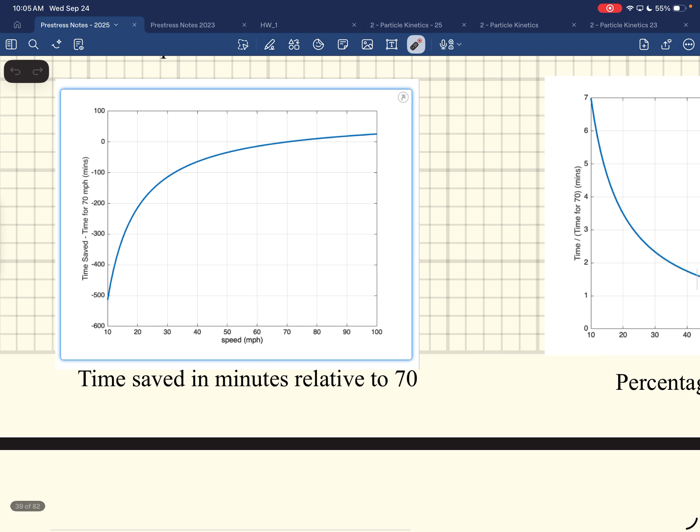How much time is that 30% for that one? It's 25 minutes in a 100-mile trip. But you're driving 100 miles an hour.

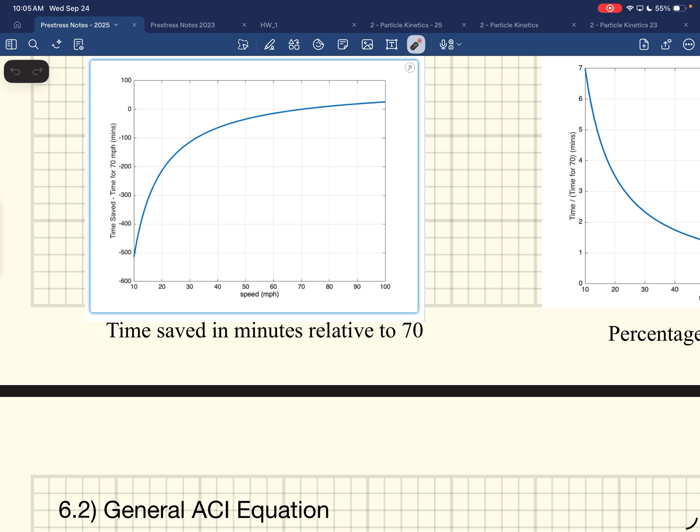It's dangerous. You know what I learned from that though? If the speed limit's 10, going 30 saves you a lot of time. If it's 60, oh, 70... God damn it, come on Luke. You're not allowed to talk anymore.

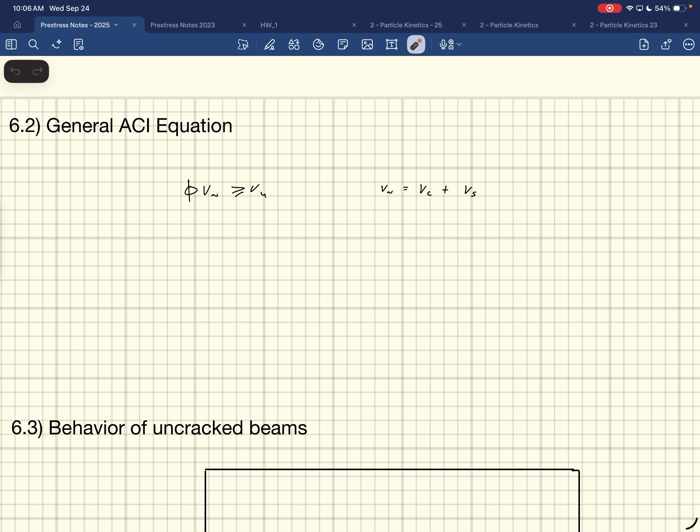Okay, back to this. You're right in that range. Where is the speed limit? School zones, 100 yards, those don't last very far, and it's 50. Parking lot, that long, but again the length is really short, so the amount of time savings, 30% is 20 seconds. That's right, okay, let's do it now.

All right, back to pre-stress. Oh, by the way, I started looking at masonry yesterday, I started putting it together a little bit. I should probably get... I'm fucking terrified, I am so scared, I'm really scared.

Have been the same notes for the last 20 years, those notes are older than I am, yeah they're really old notes. And then I did find what code governs it.

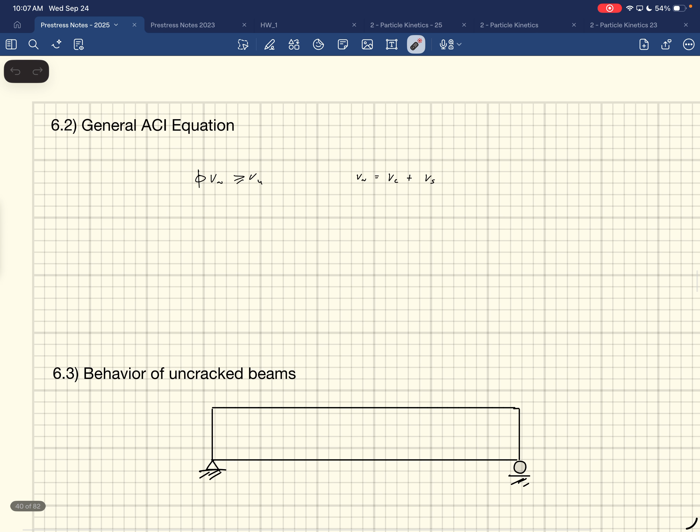I found that yesterday and started the process of getting it. That's a good first start. I thought Tim gave you that. Yeah, but his is from 2011, so what he had is pretty old. What's the newest one? 22. So you went 11 years. Anyway, I'm getting there. I'm starting early because I knew what it was going to be like.

How about what we did with Tim's computations class? I'd be down for that, an extra 15, I'd be down. Gavin is recommending doing a little bit more on Monday and Wednesday and skipping Friday. Let's do it all on Monday, just 3 hours on Monday. But then you're done at 9 on Wednesday and Friday, you're done at 10.

Okay, I'm ready now. Can we go from 3 to 6? One day a week, Monday - we're not gonna do it for 3 hours. 3 to 9, and we just do 2 weeks in 1 day.

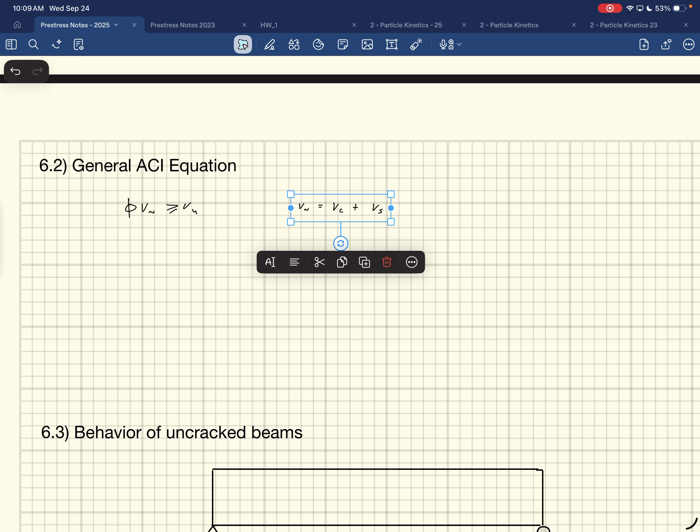So here's the general equation, right? phi VN has to be greater than or equal to VU. What is VN? This is the same equation, under the same section in ACI. It's the same general equation for this, I think it's chapter 22. We'll look at it in a few minutes. So everything's the same. This is what I wrote, this is the last thing I wrote. It took me 15 minutes to write this last time.

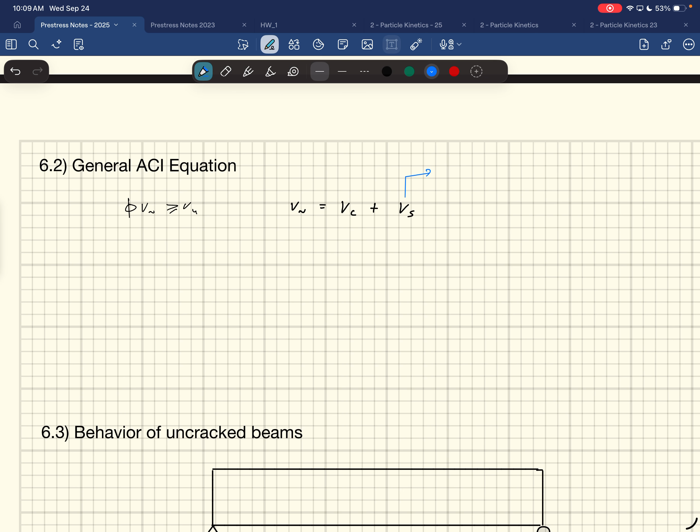So VN is going to be VC plus VS, okay? VS is the same as what we have done before. This is capacity from the steel, from transverse steel I should say, if you have stirrups in there. Same as regular reinforced concrete, right? Same equation, AVFY D over S, I think is what that is, but we'll look at that in the code in a little bit.

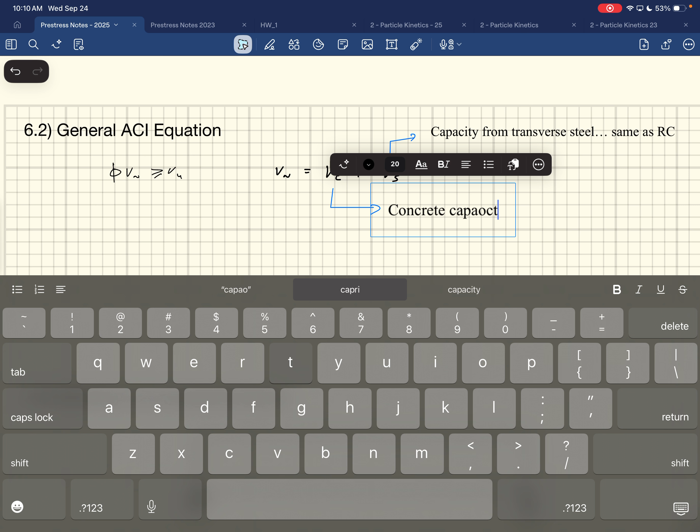Okay, so it's the same. What's different, obviously, is this VC, typing back to normal. This is the concrete capacity, the C standing for concrete. This is more complicated for pre-stressing than it is - it's actually very complicated. Like I said, this is going to be quite the exercise of going through the empirical stuff in ACI.

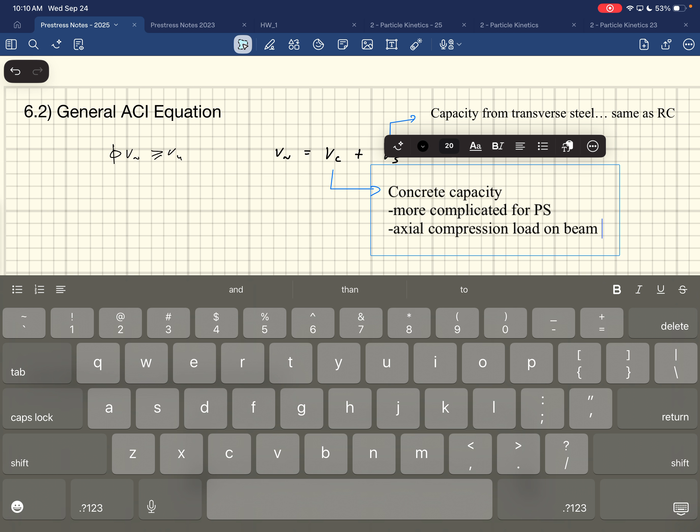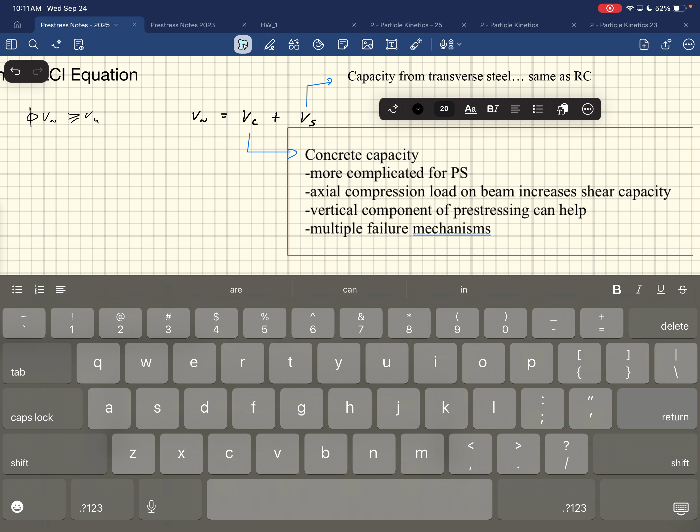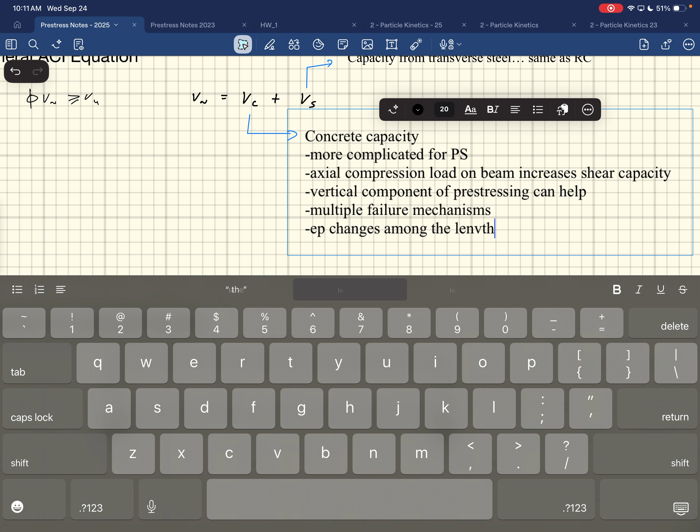Axial load or axial compression load on the beam increases shear capacity, and we'll explain how it does that in a minute. Vertical component of pre-stressing can help, I'll give you a little figure of that in a second. There's multiple failure mechanisms that we have to be worried about. And the other thing that complicates things is EP changes along length, but it's delayed here.

So these are some, and we're going to dive into these VC a bunch here in a second. It's more complicated for an axial compression load on the beams because everything's pre-stressed, so they're axially loaded. And then the vertical component of pre-stressing is this - if you have a harped, or draped section, there's a vertical component to this.

We kind of ignore that vertical component. We just pretend, in our pre-stressing, that these stresses are acting horizontal, but there is actually a vertical component to that. So some of our design equations will have that vertical component in it, to account for the help that gives. Doesn't help a lot, but it's something.

We're gonna do some mechanics here, this is what I like. I like teaching mechanics stuff, right? So we're gonna talk through this.

Oh, that's a Mohr's circle. We don't have to actually use it, we're just using it to demonstrate something. You don't have to draw Mohr's circles, I drew them for you on this.

This is a common thing you should get used to. When we talk about the pre-stressing on the end here, we look at a little stress block over on the side. We have a positive shear applied to this thing. Positive shear looks like that on that cross section.

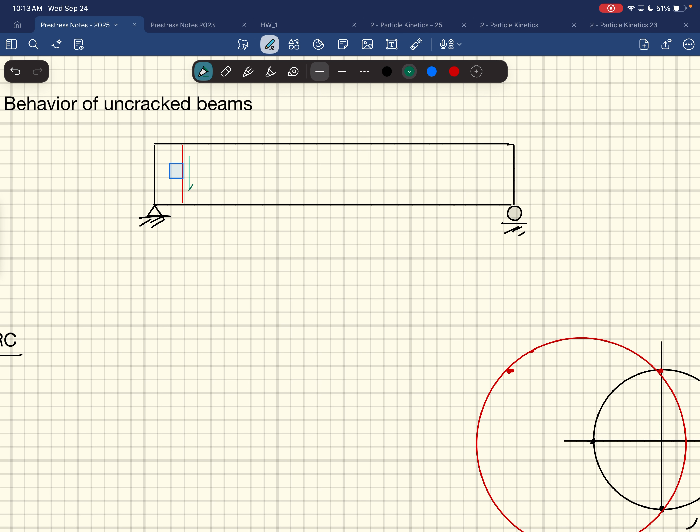So what does that look like when we look at our stress block? We're gonna draw our stress block for regular reinforced concrete right here. There's my stress block, with stress acting on it and that positive shear. On the other side it'll be this direction, it'll pinch towards the corners. This is what the state of that stress block looks like.

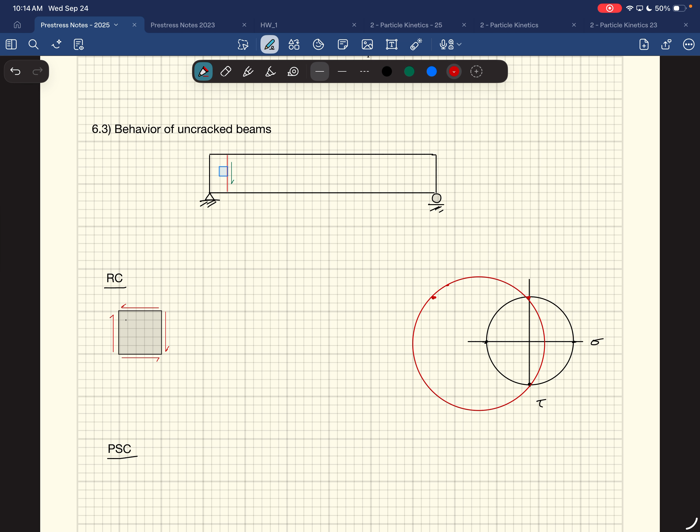So then what you do is put this thing in and look at its principal stresses. You remember doing this? You probably did this in concrete, or in solids. So you flip this guy on its side.

Let me see if I can copy it. Uh-oh.

They updated this system here and it's driving me nuts. Oh, I'm so mad at this update. How do I rotate this? If you cut it and paste it, it should give you the option. They updated GoodNotes like 30 seconds ago, they did it this morning. I could type now, but now I can't rotate anything.

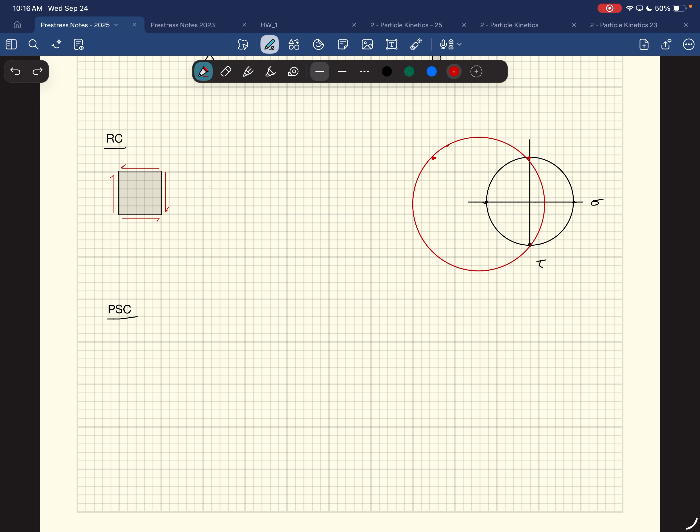Redraw it - I don't want to redraw it, Neil. I want to copy it and rotate it. I'm going to do it in Neil's head, I'm going to just draw it. I'm so sorry. See, Neil, does it look good?

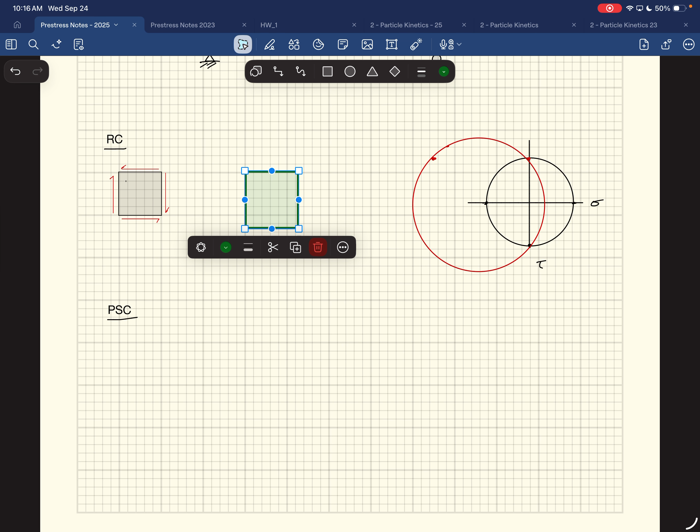Let's try one more, rotate the freshly drawn one. Man, imagine not being able to rotate - I do. Oh, those sons of bitches, why won't it let me do that anymore? I guess we just rebuild. Okay, all right, fine, let's draw it.

It's like making it into a diamond. Close enough - is it a rotated square? I rotated it, right, I rotated it 90. No, I'm just saying, is it not a rotated square? It is, but I wanted to just copy it over. What's the angle, I wanted it to be 90. Okay fine, you get it. All right, I'm obviously getting a little off here, wait sorry.

I'm trying to stay on topic today. Is this not the topic? You're making fun of Mike's geometry skills and my drawing skills, right?

So it'll pinch like this is what it'll do. This is what those principal stresses will look like, if you rotate this block 45 degrees. That's what the principal stresses are.

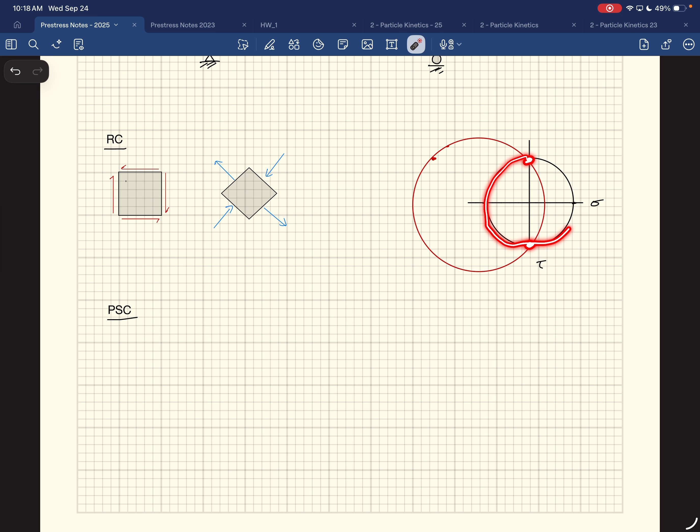You're gonna get one in compression - this side is in compression - and the other one is gonna be in tension. Here's the tension side going like this, and here's the compression coming in like that. A rotation of 90 degrees on Mohr's circle is the same as 45 degrees in the real world, if you remember that.

So I got to go from this state to this state, rotating 90 degrees, which means it's 45 over here. The whole point of this is to show that what I'd get is a crack like this. This tension stress is how concrete fails due to shear, due to these tension stresses. Those tension stresses get to a certain point and cause the concrete to crack and give way. That would look like this point right here.

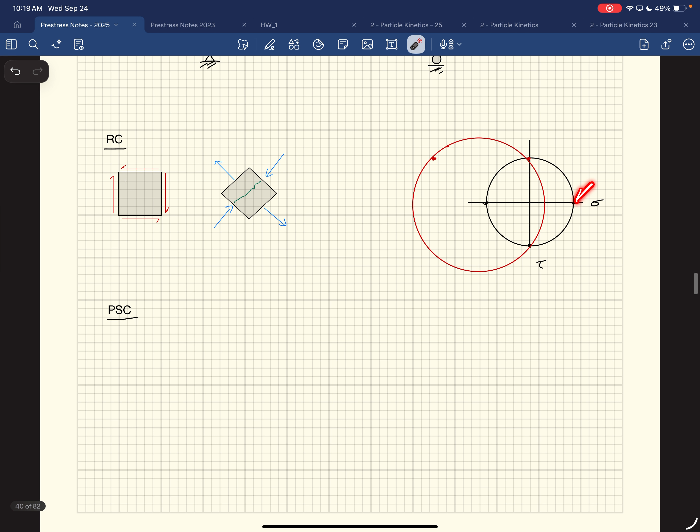And this, according to ACI, would be the rupture strength. FR is equal to 7.5 square root F prime C. So this would crack when my tension stress over there hits 7.5 square root F prime C. Okay, if I'm going to add pre-stressing into it...

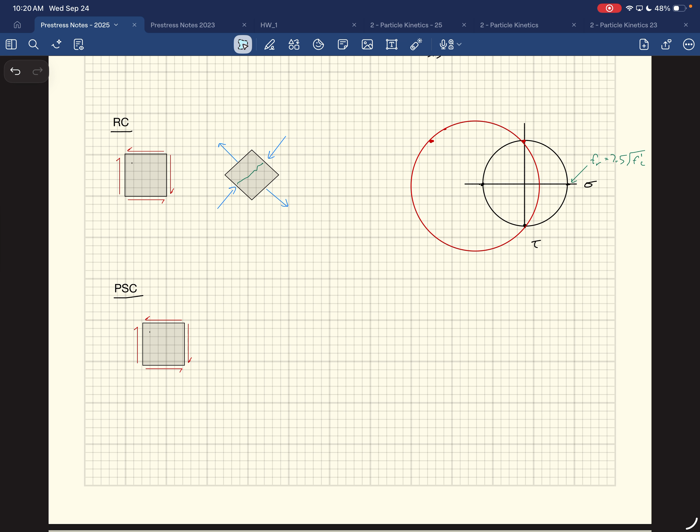Let me do that, I've got to copy these. So we're in a case where, if I have pre-stressing, I would have a big normal stress doing this. I used to just make it straight across, and now it puts it at an angle. We've added pre-stressing to it, and that pre-stressing on that beam would be a normal stress acting this way, not this direction. We're not going to have any this way.

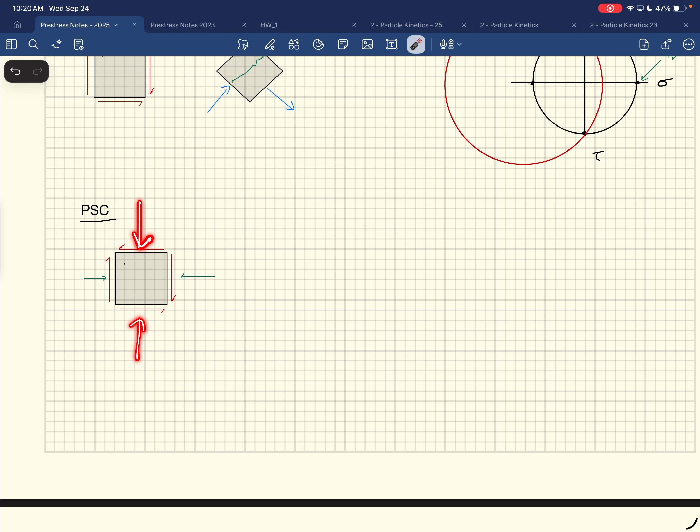You won't have it that way because there isn't pre-stressing in that direction. There's only pre-stressing in this direction, so on one of the faces.

So then on Mohr's circle, what that would look like is one face would have zero normal stress, and a shear. That'd be that point right there. On the other face, I would have a normal stress in compression, so it'd be this direction on the diagram because that's a negative value, and then the same shear stress, positive. So it'd be this point right here, and then you just draw a circle around that.

The whole point of doing this is to show you what happened to the tensile stress when I did that. They have the same shear stress, but the tensile stress moved to the left. So this one broke at this shear stress because it ruptured like that. This one won't break because at the same shear stress it no longer reaches that 7.5 square root F prime C, because that compression holds things together.

That's my graphical appeal to you—principal stress is what's happening. The other way to think about it is the concrete fails due to tension; we add some compression in there, and then it doesn't fail at the same load. You could say it the same way, but as an academic, I got to show you Mohr's circle.

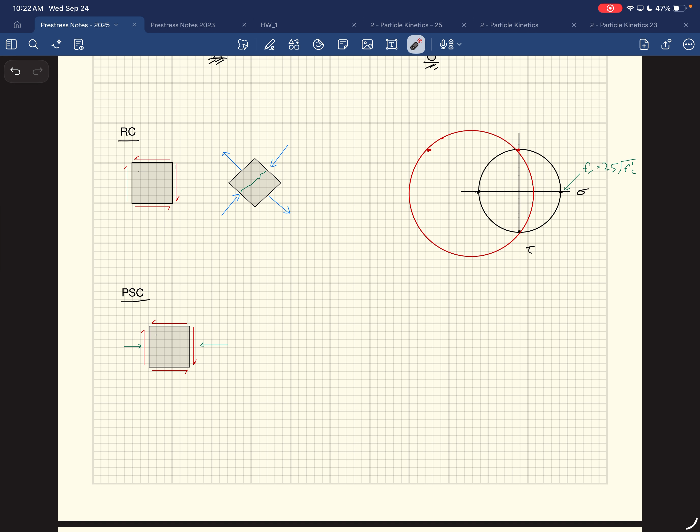So there you go—it adds that and shifts it over to the side, and then the angle would change too. The angle changes, it's not at 45.

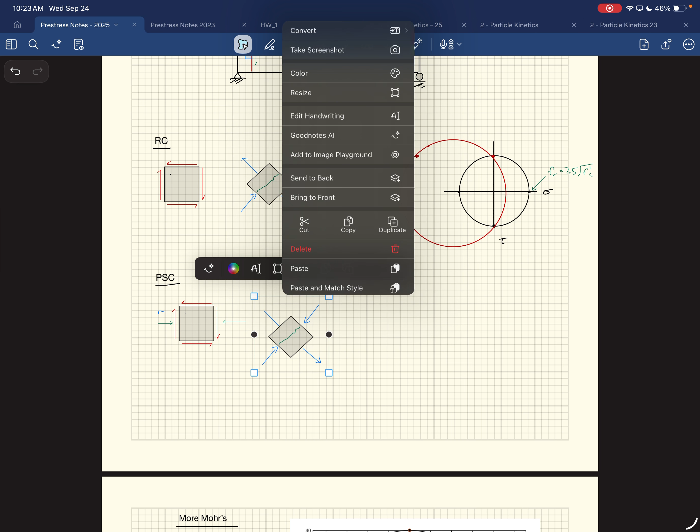It'll be steeper. Oh God, that's what I want to rotate. I'm going to try one more time to rotate it. I feel like that should be a command. See, there used to be a thing that was pulled down and I could grab that and drag it around. I don't know what happened to that. Ooh, what if you select it, like draw a circle around it, and then press and hold? Shouldn't it give you a menu? Yeah, you can't see it. I got paste and match style, zoom—oh wait, I got it selected first. Hold it, and then I could say convert, screenshot, color, resize, edit. Maybe it's edit, edit handwriting. What? It used to be resize. Yes, there's resize—it's new too. Just don't update stuff, man. You won't let me do that. Don't update it, don't update it. Okay, I'll just draw it again now. I'm so excited about the new update, now I hate it. Why don't they still fix this up? What do you—oh my God! I think it's an apple.

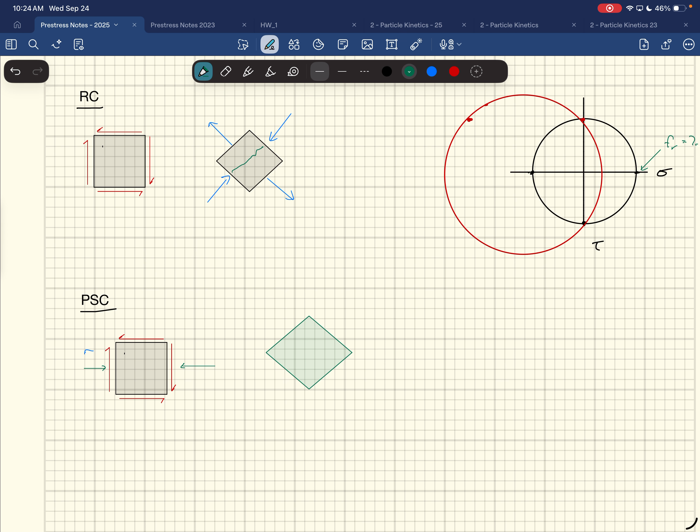That's the difference—whoa, this thing, it's not as steep. Hey, why can't I draw? I'm just going to go back to the old days, I'm going to freehand it. Oh God.

There we go, fair enough. The same thing, right, but it's just a little bit steeper.

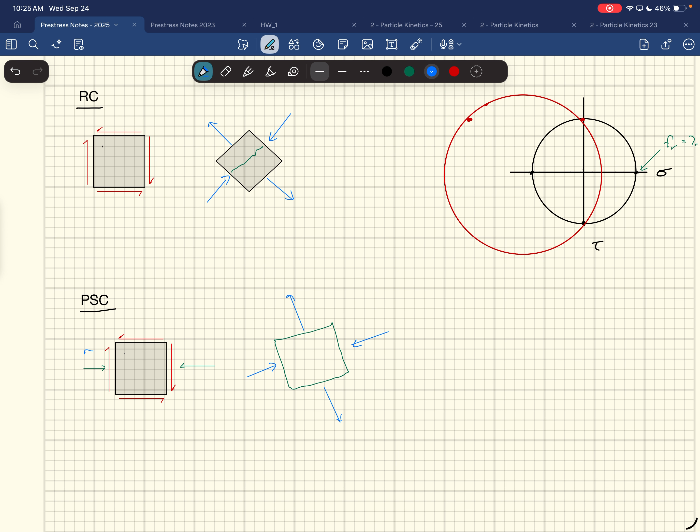So the crack won't be at 45-degree angles, right? It'll be a steeper crack that forms. All right, so the big part here is pre-stressing shifts the circle left and makes it bigger. That's the key takeaway from all that, right? The pre-stressing increases the shear capacity, right?

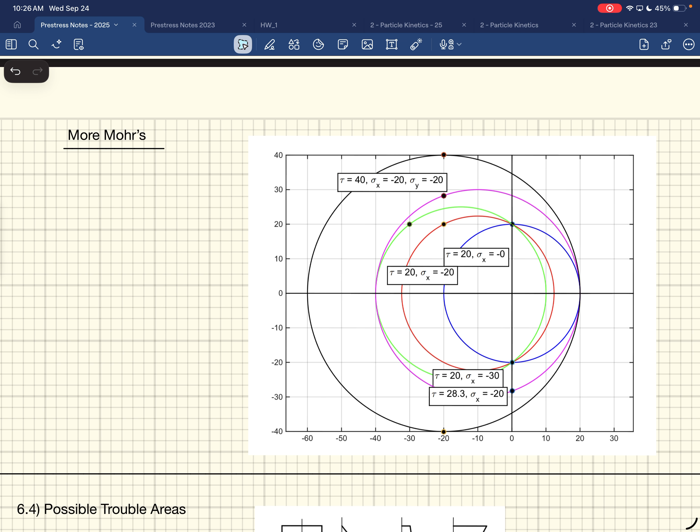So we do Mohr circle advanced mechanics, huh? Just in case you didn't have enough Mohr circles, I made some more. This is MATLAB. This was obviously from several years ago, and I made a function called Mohr circle, and then you just gave it things and it would plot the thing, and I had a little extra time on my hands. Just like yesterday when I made those plots about the velocities, I made those in MATLAB too. You get scared by masonry, and I was like, oh God, I'm going back to this stuff.

So what we got here, this is just like with actual real numbers and stuff, right? So this would be just the case right here, that's my blue one, right? That's my base case, which is just a shear of 20 and a sigma x of 0. So there's no compression on that one, right? And that one would fail. So according to this, this would hit the 7.5 square root of f prime c.

So that's where that one would break, okay? So then I just took the same stress state, the same shear stress of 20, and then I just added a compression stress of negative 20, so in compression. So that's what this red one is. And again, just to show you that it shifted it to the left, so that one would no longer fail, right? Because it's not hitting that 7.5 square root of f prime c, right?

And I did another one, this one right here, that would be the case there. That would be 20 and then 30 for the pre-compression. So we're adding even more pre-compression to it. And so that one's even less likely to fail, right?

If I wanted it to fail with a normal stress of 20, that is this guy right here, this pink one. And in order for it to get that one to fail, it'd have to get bigger, and because it's shifting to the left, I'd have to put more shear stress on it to hit that 7.5 square root f prime c. So it'd be 28.3. I would have to increase. I mean, there's your difference, right? At 20 psi in compression, I would have to apply a shear stress of 28.3 on it, versus if I didn't have any stress on it, it would fail at that.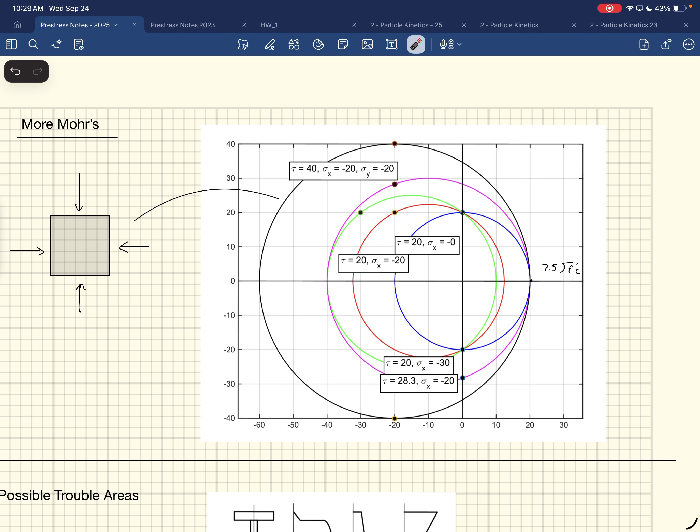Anyways, that's a Mohr circle business, which I like. Okay, so some more theory to get into, right? Because all this stuff is behind what we're gonna get to. You don't see Mohr circle, you don't see anything like that in the actual design equations. Actually, by the time you're done with the design equations, you're gonna wish that you did Mohr circle. That is a 100% true statement. It is 100% true, Garvin.

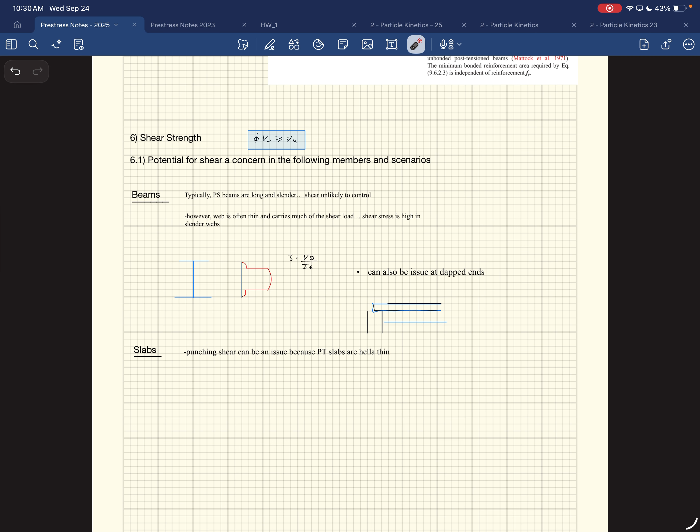Okay, so where are we going to see problems? We talked before about these beams. If you have a dapped beam, you can run into some problems there, and usually it's going to be in the web because of this. But where along the length of the member are we going to run into problems? Obviously, dapped ends would be right where that dapped end is.

Okay, so this is all in Stanton's notes. I've just taken this stuff out of Stanton's notes.

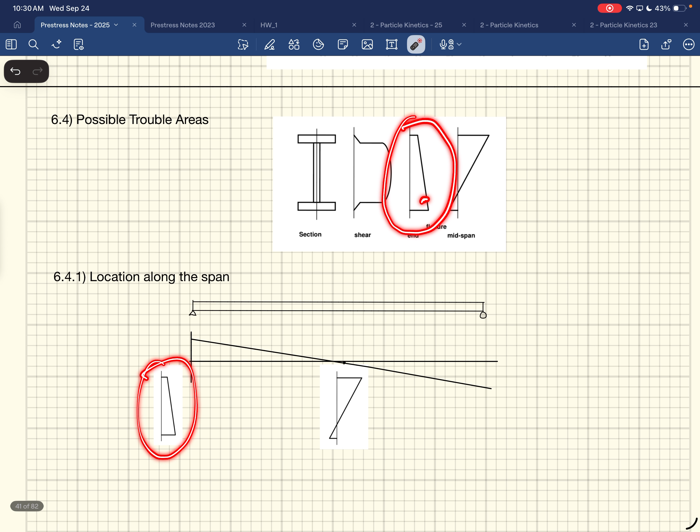So what we said before, that's what our shear stress distribution is going to look like in a typical I-beam. Near the end of the member, when there is no external moment, we're going to have a lot of pre-compression, because near the end the moment is zero. This is the case where the thing's popping up, where you have a bunch of pre-compression at the bottom and a little less at the top because it's kind of bending up, but most of my section is in compression.

If I have a lot of my section in compression, then I'm getting the benefit of the compression over the entire height of my member. So my shear capacity has gone up. The problem with that is the demand is really high over here too, so my capacity is high and my demand is high.

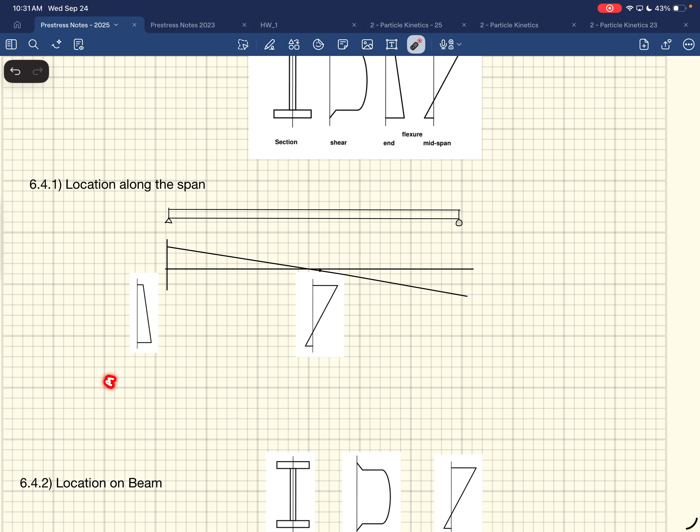So over on the left-hand side, demand is high but capacity is high too. Most of the section is in compression because there's no moment or low moment there, you get it.

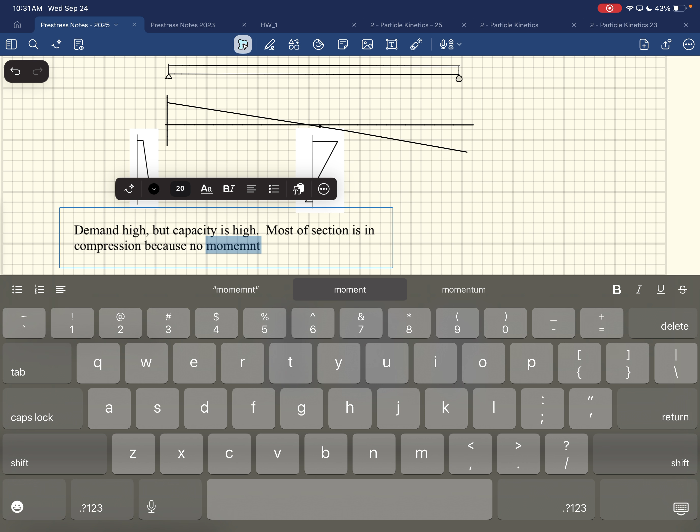Near the middle, you're going to have a lot of external moment pushing this thing down, and you're going to have some tension at the bottom up until what we're allowed to have, then really low compression and then up to some really high compression.

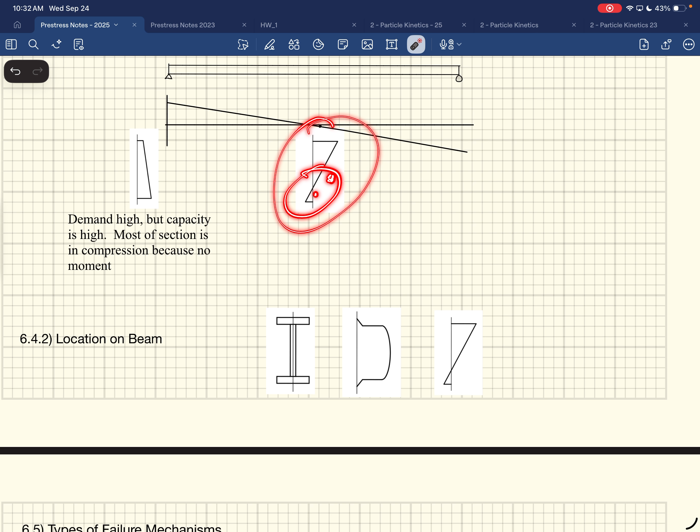So your capacity near the middle is going to be down, because near the middle part of our cross-section is going to be in tension, so the opposite will happen. If you add tension to these Mohr's circles, it's going to cause it to fail even faster in tension. Compression helped you, but tension is going to make it fail even faster. So near the middle, there's going to be parts of our cross-section that are in tension.

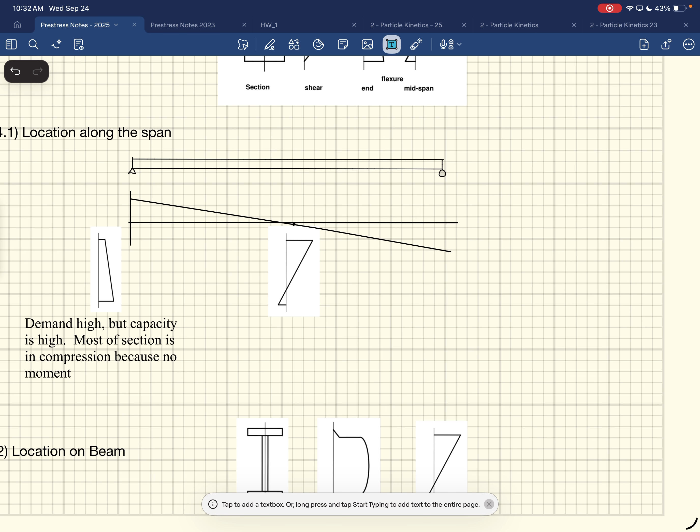But the benefit is our capacity is down, but so is the demand. Here's the shear diagram right here - the shear demand near the middle is really low. So here we say shear capacity is low, but so is demand. So that may not be the trouble area.

Where the trouble area actually is, and you'll see this in your homework, is in here... not like that. Oh, I'm so mad that you can't rotate these things. I bet it won't let me even do an oblong one anymore. There's got to be something.

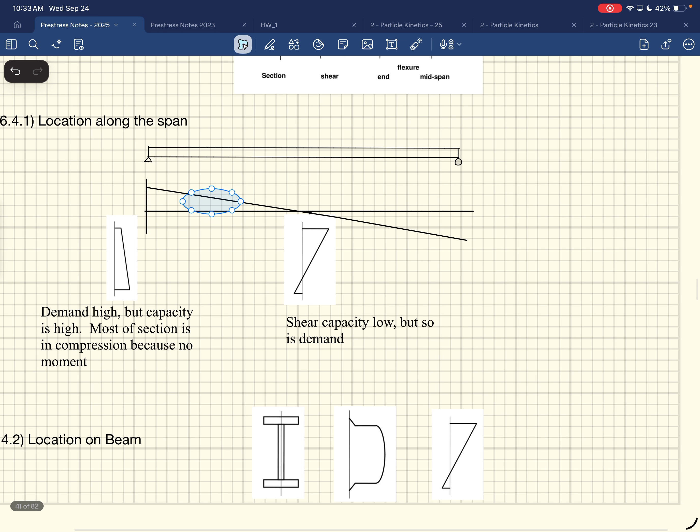Okay, anyways, that's fine. It's going to be somewhere in here, like I said, in our homework you're going to see that. That is where it has a problem, somewhere between the middle and the ends. Like I said, in your homework you'll see that if you do your homework right.

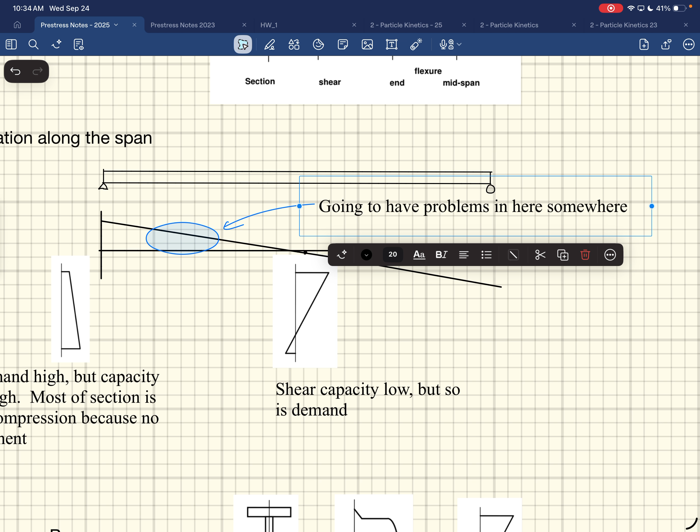Okay, that makes sense to everybody why it's happening, right? High demand but high capacity, or the other way around, and then shear capacity is low but the demand is low. So it's going to be somewhere in between. So where on the beam are we going to run into problems?

On the beam itself, we kind of alluded to this. You've got lower shear demand in the flange, because there's not much there - the VQ over IT, the T is really big, so there's really low shear stress right there. Where you're going to run into a problem is going to be in the web somewhere, because the demand is higher in the web.

And then it's going to start down here. The reason you're going to have issues here is because we have tension down there - remember, tension makes it worse. So you have tension near the bottom and compression at the top. At the top my capacity is actually pretty high, but at the bottom my capacity is low, because I have tension. So what it'll do is start near the bottom - it's actually going to be right here.

We have issues here - shear demand high, and beam may be in tension longitudinally.

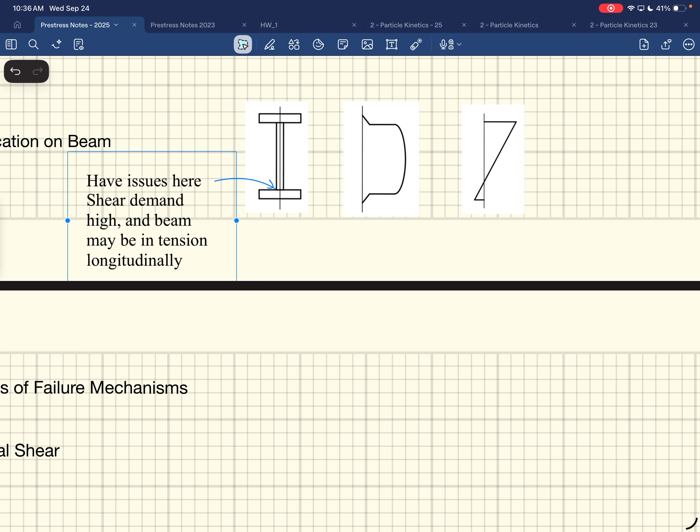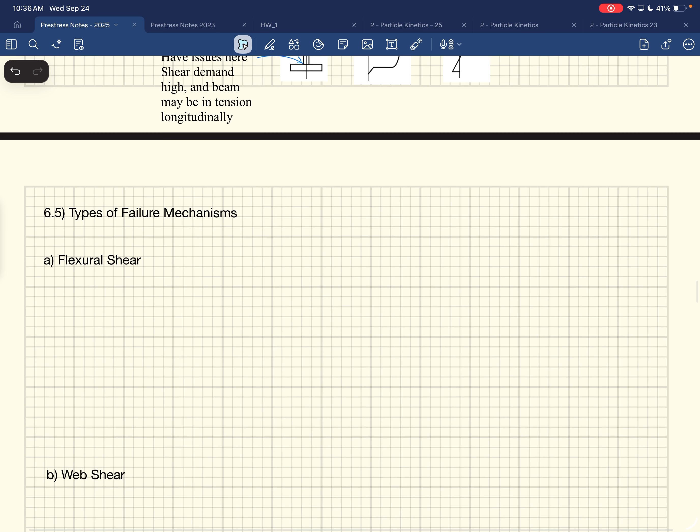So, types of failure mechanisms that we'll see. I don't know why I didn't give you pre-drawn beams, but I'll draw a beam now. Oh my God, that was a rectangle. God damn it, I need that tool.

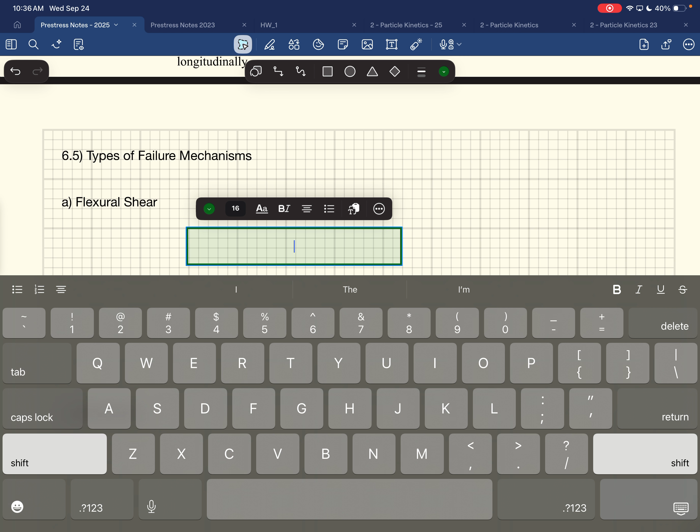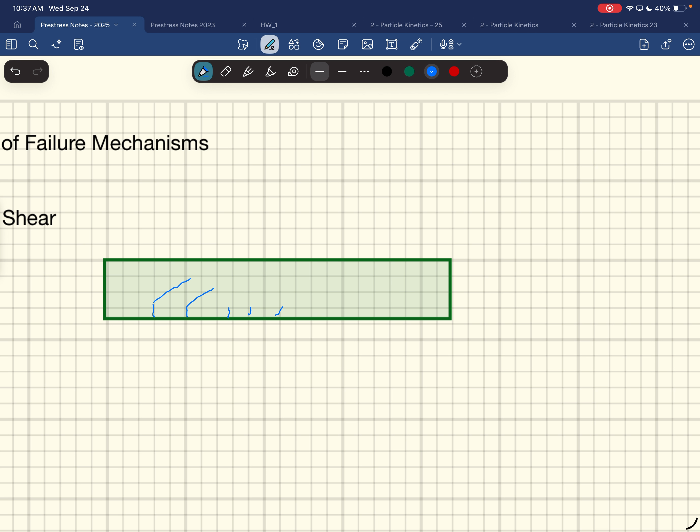So, flexure shear failure - why? Oh my God, the flexure shear failure, it's going to do this. It starts out as a flexure crack, goes up like that, and then it turns into a shear crack.

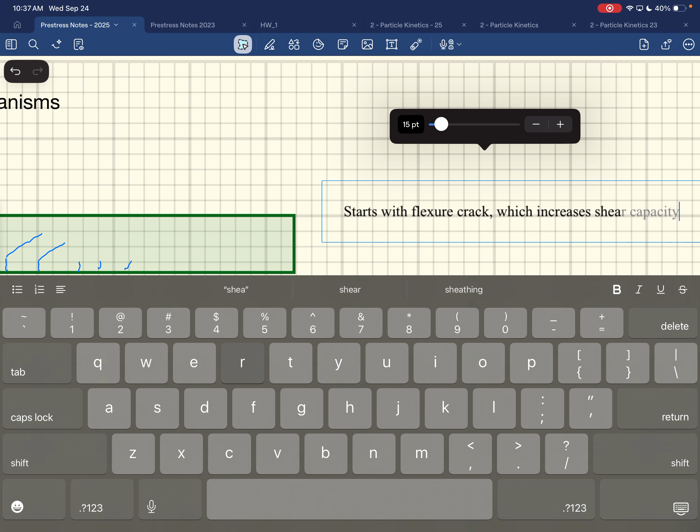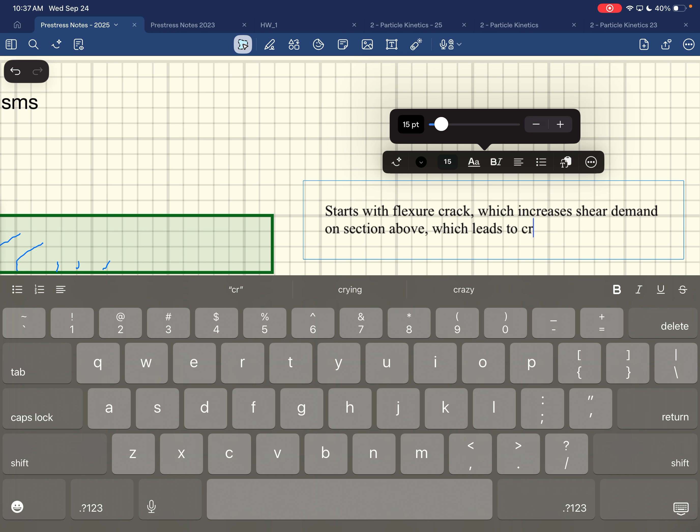Starts with flexure crack, which increases shear demand on the section above, which leads to a crack in shear. So it starts out flexure, the demand gets bigger, and then it shoots across like that.

This would be happening in the web, right? And actually it'll initiate in the flange and work its way up. In ACI, this is VCI.

If you're reading through Stanton's notes, when you get to this section, he has a big long section where he derives the VCI equation in ACI. Don't do that - when you get to his derivation, just ignore it. We're just going to use it, don't worry about deriving it, because like I said, it's pretty nuts.

But that VCI is for the flexure shear. And if we have web shear, it just fails directly in the web.

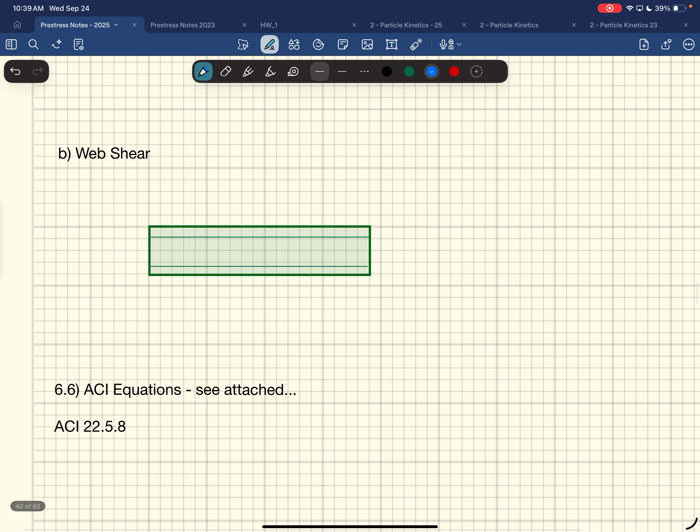And if this is an I-beam, you have the flange down here, the flange up here. And you just start getting cracks where you don't actually see any - they don't initiate as flexure cracks. The web just fails in shear.

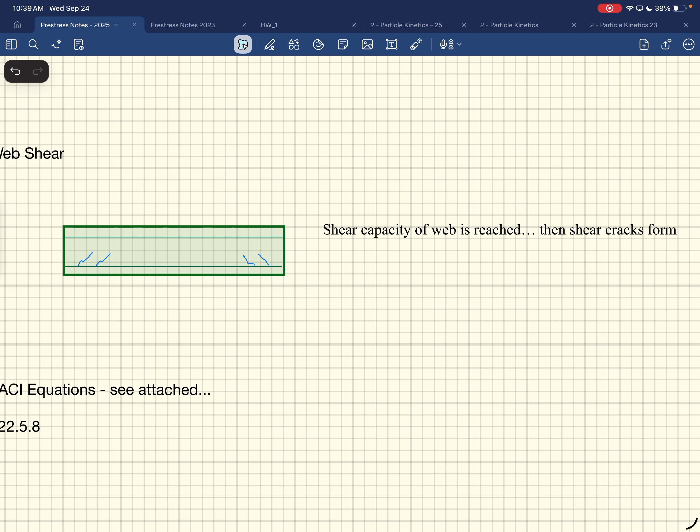Shear capacity of web is reached, and shear cracks form. This is VCW in ACI.

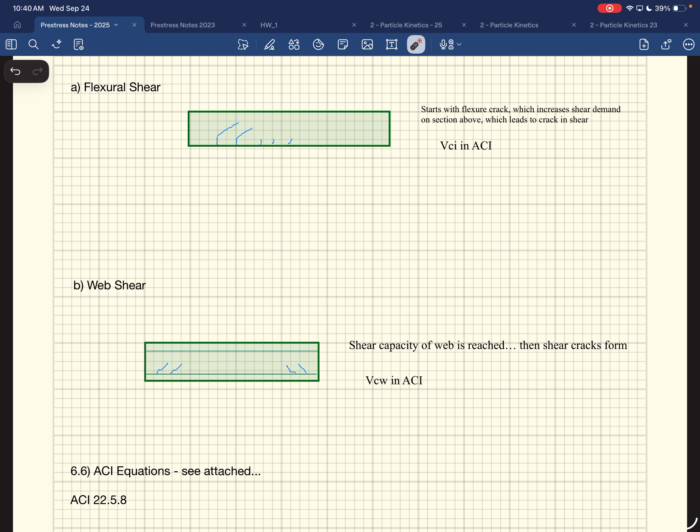There's going to be a calculation we do where we don't know which of these things is going to fail first - is it going to hit my flexure shear capacity first, or my VCW first? You have to calculate both, and then grab the lower, the weakest link. What gets complicated is that it can change along the length of the beam - in one location VCI might control, in another VCW might control. So you end up with a plot of both going across, and you grab the minimum of the two as you go across, and that gives you your limit. Just a little foreshadowing of where we're headed.

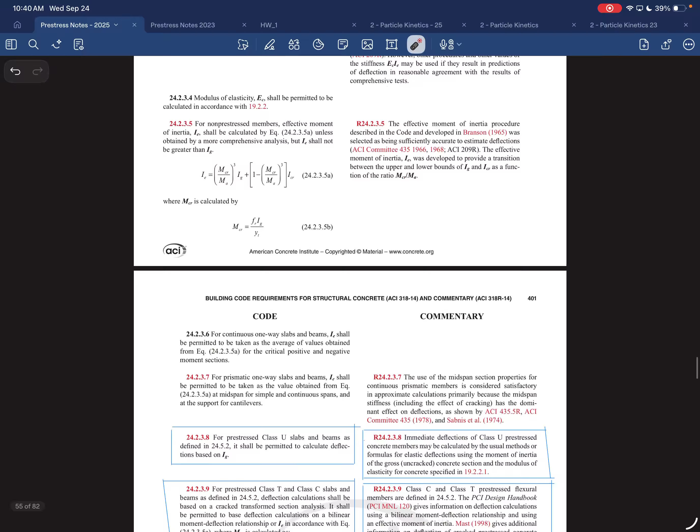I have the solution somewhere - nope, not in there. I have it here. Does it make you dizzy if you look at that?

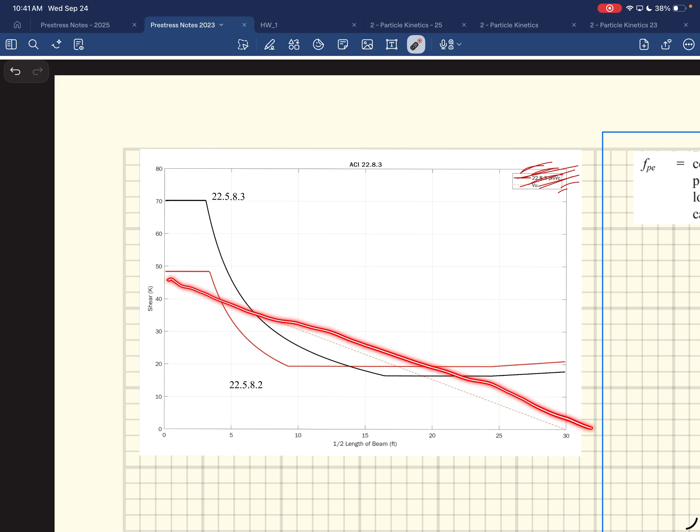So if you looked at all of these, there'd be one going like this, another going like this, and built into my code, I'm grabbing minimums as we go along, formulating that envelope we have. And then my demand is this guy going across. So like I said, where you're going to run into problems is somewhere in between. This is my demand, and this is where my capacity dips below my demand, somewhere in the middle. It's fine on the ends, fine in the middle since this is just half the beam, but it's in between that it's violating that. But we'll get there.

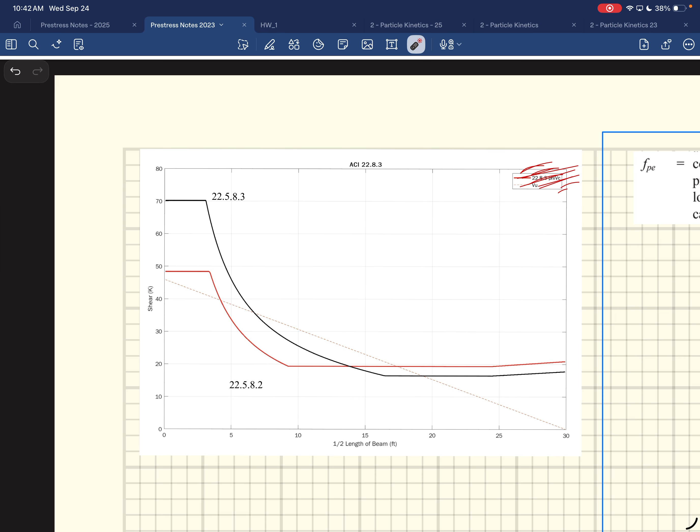Okay, so let's look to see what ACI has to say about it. Wait till you get a load of this. Starts out pretty innocent, right? So let's look at the ACI equation.

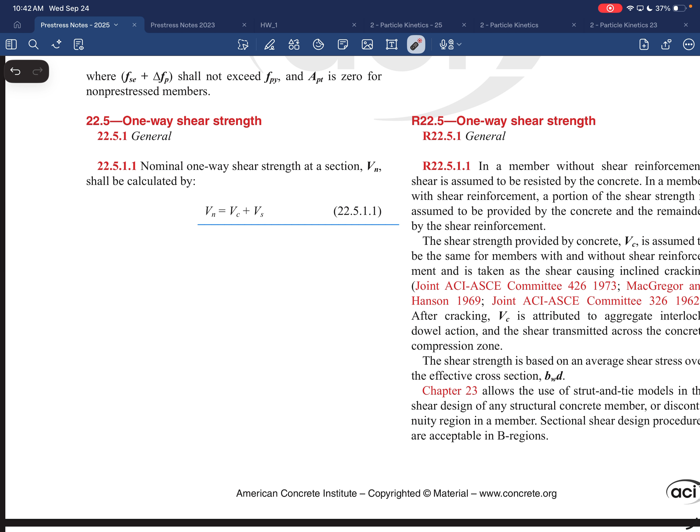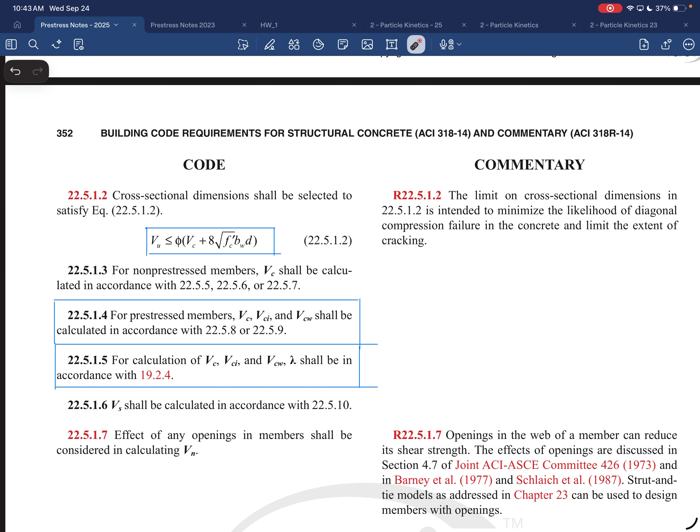So 22.5 is shear capacity in concrete, we get right here. It starts out for both - this works for both regular reinforced concrete and pre-stressing. Pre-stressing is built in throughout. So my VN is just VC plus VS. And what we use for VC, there's still this limit that applies here as well - this is just a limit on cross-section size, built into regular reinforced concrete limits you've done before. So there's that limit right here, and the only way you can change this is changing your cross-section size.

And it says for pre-stressed members, VC, VCI, and VCW shall be calculated in accordance with sections 22.5.8 or 22.5.9. So there's this section that discusses this.

It's going to make it an oval, I guarantee it. So mad. Oh, and it tries to turn it into text.

Okay, for calculation of VC, VCI, VCW, lambda should be in accordance with this. Lambda is just a lightweight concrete thing - we're going to stay away from that, but there will be a lambda floating around associated with the lightweight concrete.

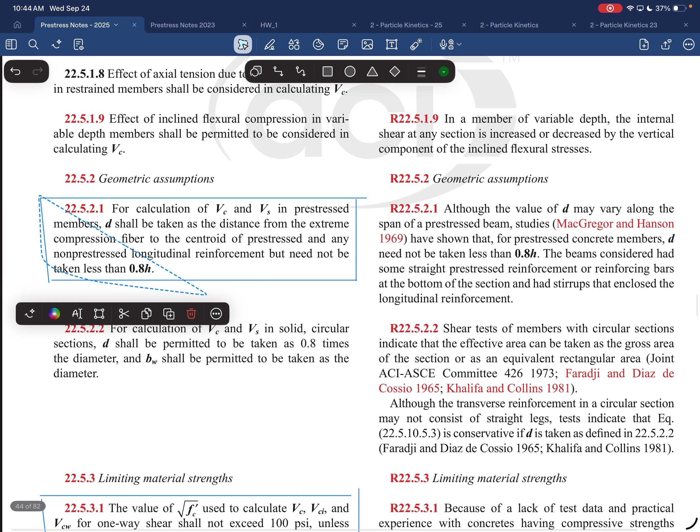Okay, then we come down to geometric assumptions. This is a limit that's going to be built into all of our code. I don't know why it keeps doing that.

It crashed on me. Okay, so for calculations of VC and VS in pre-stressed members, D shall be taken as the distance from the extreme compression fiber to the centroid of the pre-stressing and any non-pre-stressed longitudinal reinforcement, but need not be taken less than 0.8H.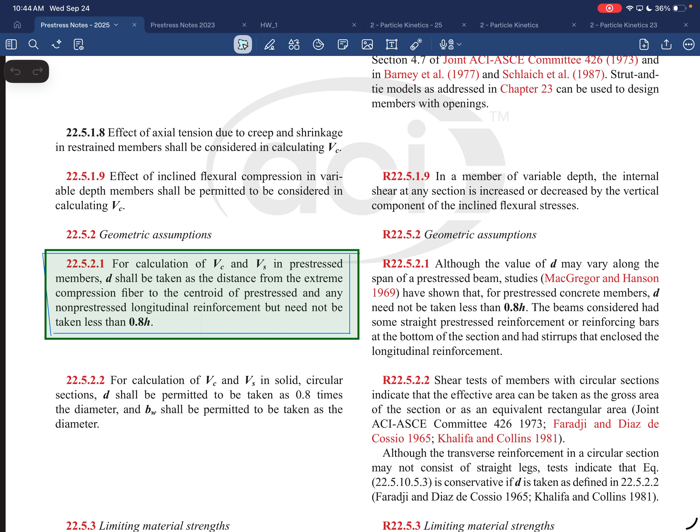Okay, so that's something you'll have to build into your calculation, is that it's the distance, because what's happening is D is changing along the length. So if it's a harp section, let's look at it like this - it's a harp section, it's going, oh gosh.

Right, my EP is changing, so my D is changing as we go along. The D is the distance down to the neutral axis, from the extreme compression fiber. I guess I should put a beam around that. Right, it's the distance - this is the distance D right here, from extreme compression fiber down to where the steel is.

And it's going to change as we go along the length of it, because our steel location is changing as we're going across. Our pre-stressing is - we're making it deeper near the middle and more near the centroid along the side. But when you're calculating this D, eventually that D could go to 0, because if this was right at the centroid, it would become really small, because it's going up to the thing.

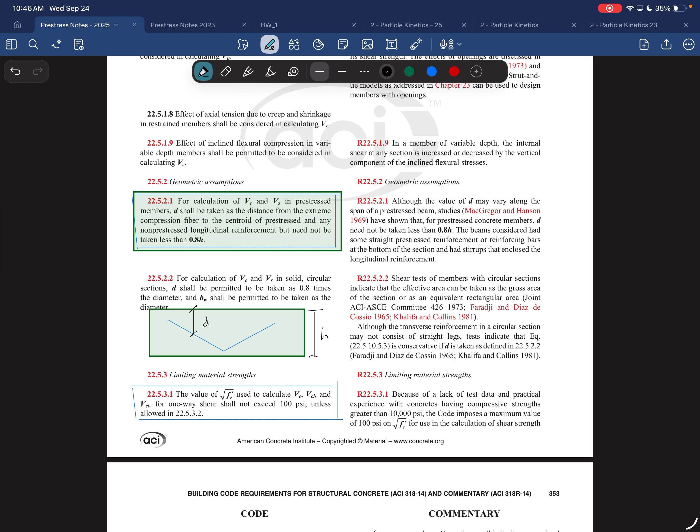It need not be less than 0.8H. It's saying that even though your D is less than that, you can use up to 0.8 times H - H is the total height on this. You can use up to 0.8 of that, that'd be your D. And so it's saying you could do that. So could you use smaller? Yes, you could use smaller values, but if you do that, then you're being overly conservative, because the code allows you to use 0.8H. You don't have to go smaller than that. Okay, so that's a limit that's floating around.

The other thing they put in there, I don't think this is going to affect us at all, but there is this right here. Oh my God. I wonder why it does that. So mad. As an engineer, I want to box it, I don't want to oval it. I don't oval my answers. You oval your answers? No, at right angles.

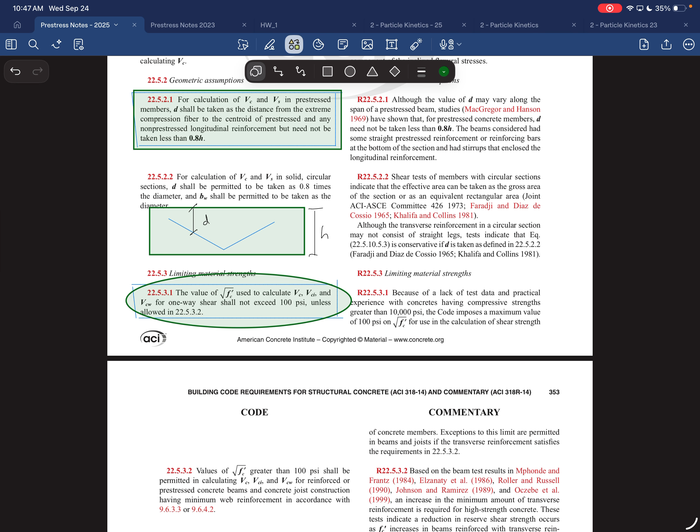There's a limit on the square root of F prime C. One-way shear shall not exceed 100 psi. So for an F prime C of 10,000 psi, or 10 ksi, if you take the square root of that, it'll be over 100. It says you can't go over 100. There's no research showing how these high strength concretes affect shear capacity, so they put a limit on it. You can use over 10 ksi concrete, but in these equations you can't use more than 100 psi for the square root of that 10 ksi. Keep that in mind as we go through.

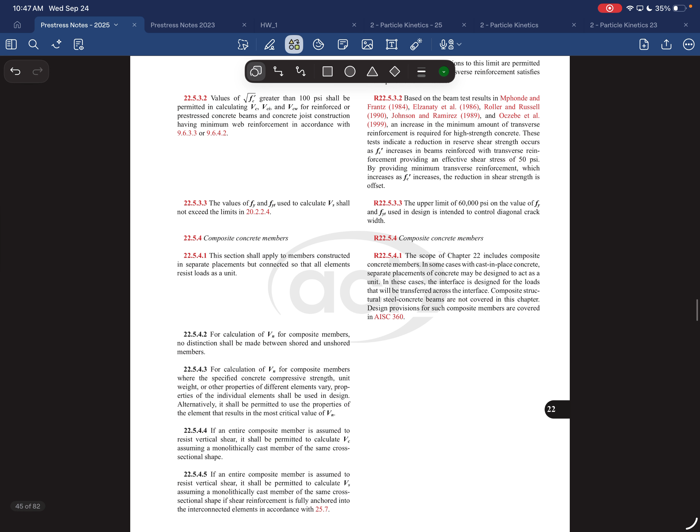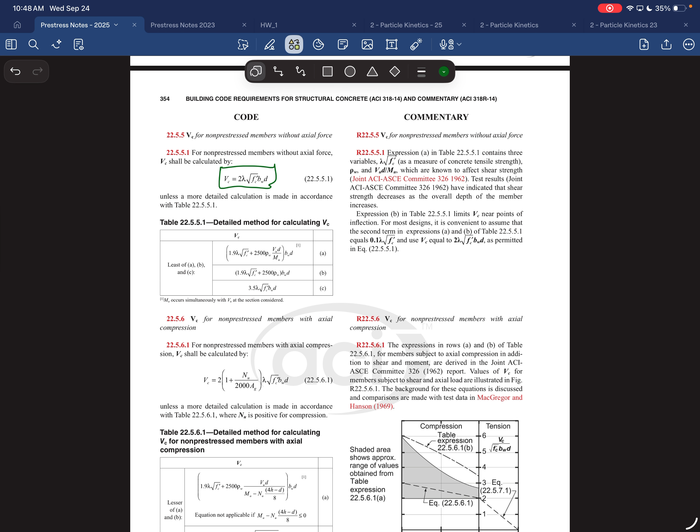Let's see what else we have down here. This is what you do for regular concrete, just to show it to you here. There's your 2 times square root F prime C, B, W, D, right? And then there's a more detailed method. This will show up in one of our equations, that's why I wanted to box it here. But that's what you would usually do, and that's where it defines VC. Keep going down.

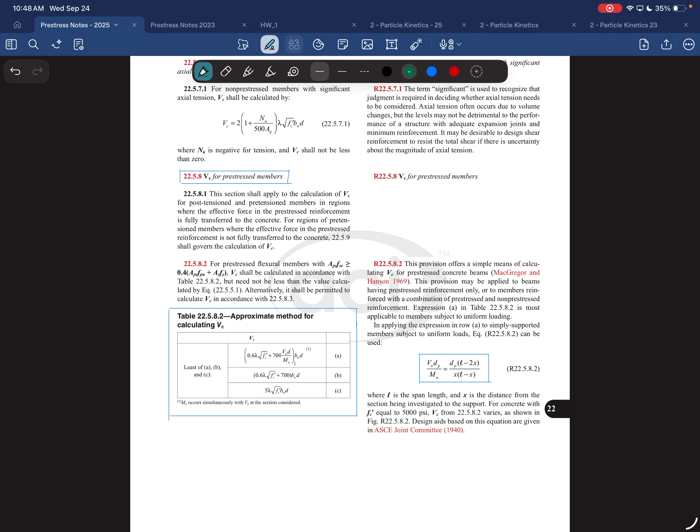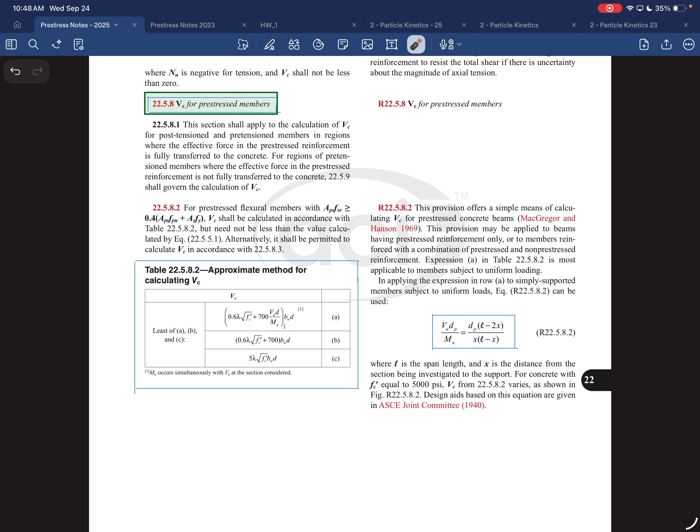This is all non-pre-stressing, and then here we go, here's for pre-stressing. Pre-stress members, right, there's 2 different methods you can use for calculating this. This section applies to all calculation of VC for post-tension and pre-tension members in regions where the effective force in the pre-stressing reinforcement is fully transferred to the concrete. For regions in pre-stress members where it's not fully transferred, then you do these other things. So according to that, you're going to do 2 different methods. You're going to use this guy.

I want this thing, use this guy. That's one of the methods, that's 22.5.8.2, right? And it says here's your equation. So this is the simplified approach, this is the approximate method. This is the easier one to do, okay?

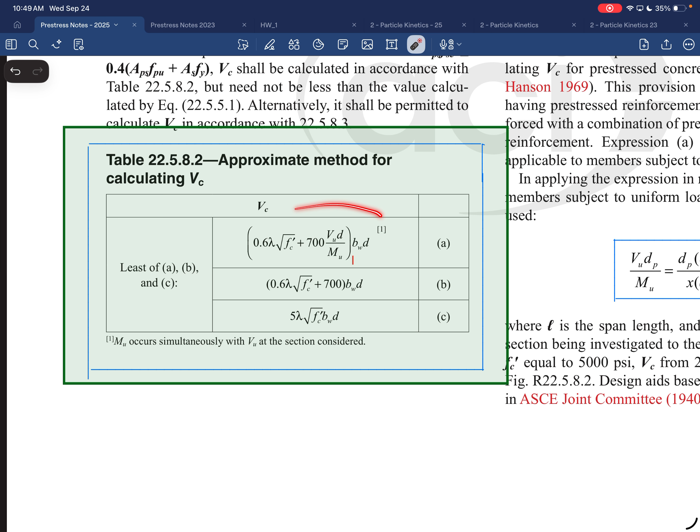Then the VC is going to be the least of A, B, and C. So you're going to calculate every one of these, A, B, and C. It's going to be different in different locations along the length of the beam. You're going to calculate this value, VU dP over MU. It's very straightforward, you just put in the values that you have, be careful of all your units, be careful, there's some assumptions over here. You should take advantage of this if you can. They have some limit, or they have a calculation for what this value is, that can be substituted in right there. But then you'll calculate this, and this, and this, along the whole length of the beam, and then you'll take the minimum of each one of those things.

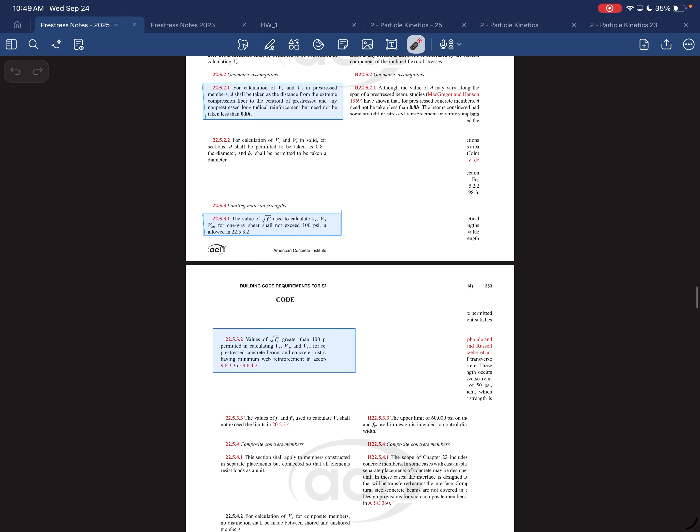So on this solution here, like I said, you'll see one of those. This is 22.5.8, I think it's this one right here, that's one of those limits. That's like A, then this one's like B, and this one's like C, something like that. I don't know exactly what it is, but it's somewhere along, I don't know which order they are in, but that's the 3 that are there. So which one of those controls is going to be dependent on where you're at in your beam, so you have to calculate all those things along the length.

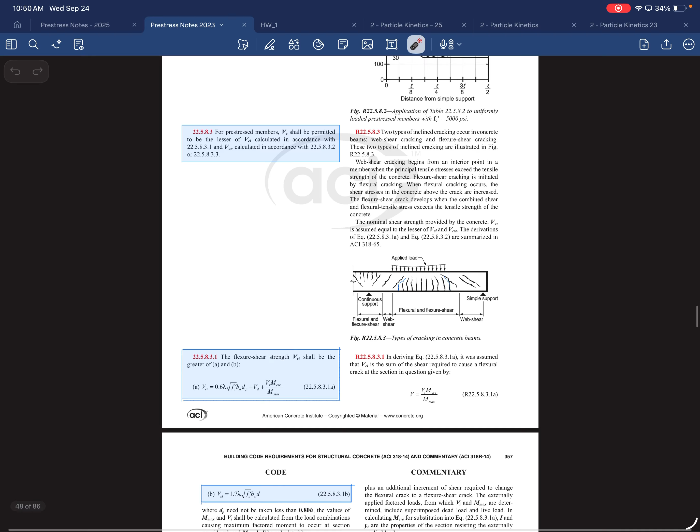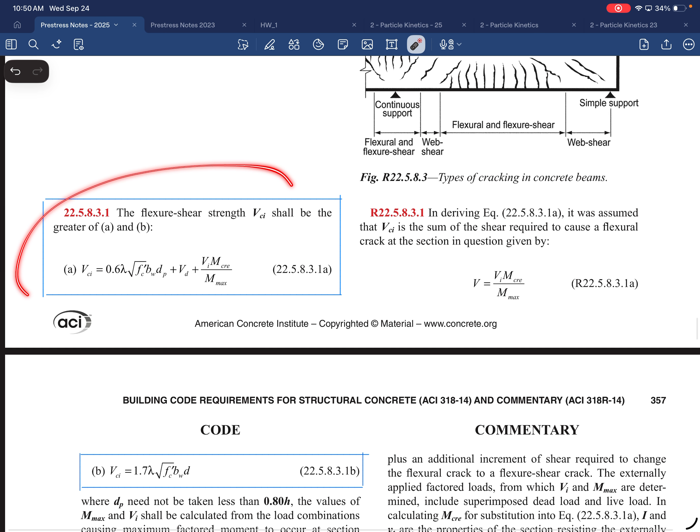And then what we'll go into next time we meet is the next section. That's the simplified method, and then we'll do the one where you calculate VCI and VCW. So VCI, here's our equation for VCI, it's either this one or this one. It's a function of M cracking, which is that equation right there. Huge discussion of stuff over here. Then we get down, and here's finally VCW. VCW will be this, but it has some other limits associated with it right there. And then there's all these other terms that are floating around that it uses.

And what gets really complicated is ACI uses variables like FPE, lowercase FPE, like we use lowercase FPE, but they're different FPEs. My FPE is different than their FPE. There's also different Ys floating around that we have to be careful of, because their nomenclature is different than our nomenclature. So you just gotta be really careful with all that stuff. But again, that's what I want to go over with you. Once you've tried doing a little bit, then I will come in and say, here, be careful of these spots. Okay, much more productive.